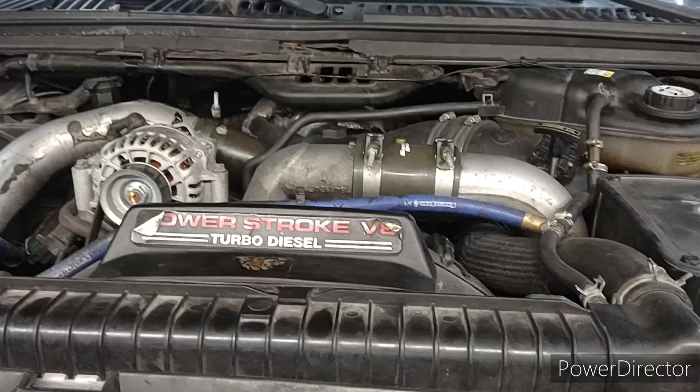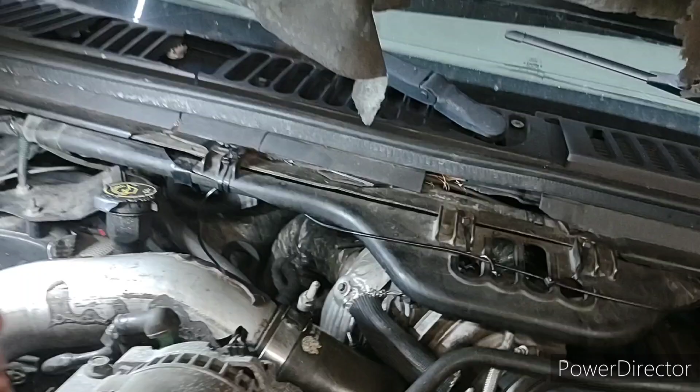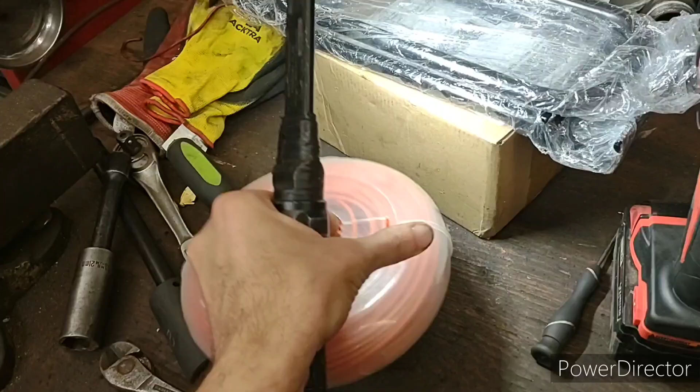Doing some maintenance today. I checked, been having some sluggish acceleration, so I checked the map sensor hose that goes into the intake body there. I pulled the hose out and ran a piece of string trimmer line down in the hole, made sure the hole was actually clear and wasn't anything blocking it, so that was fine.

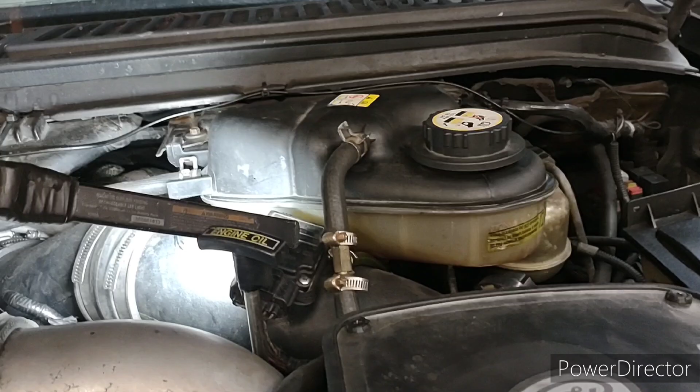Next thing I did is pulled this out. This is an intake sensor for airflow or something like that, MAF I guess they call it, mass airflow sensor. Took it out, cleaned it with some electronic parts cleaner, made sure it was clean. And then I also cleaned

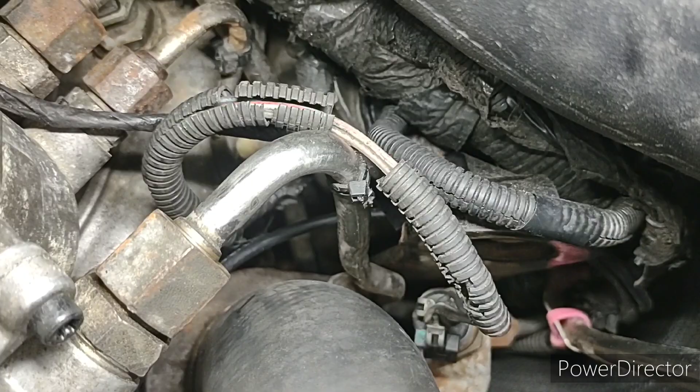right there. That is your EBP, exhaust back pressure sensor. I used, I think, like a 25 or 26 deep well socket to get it out.

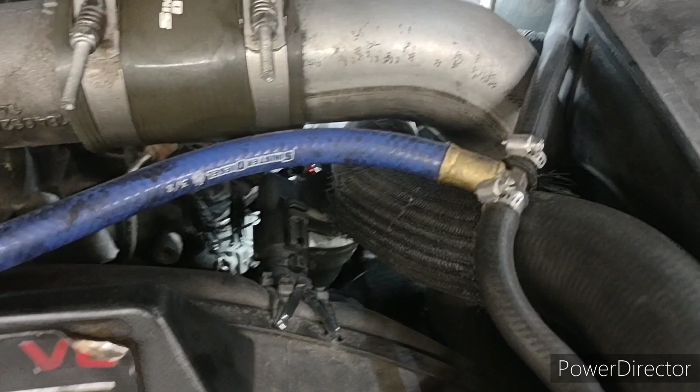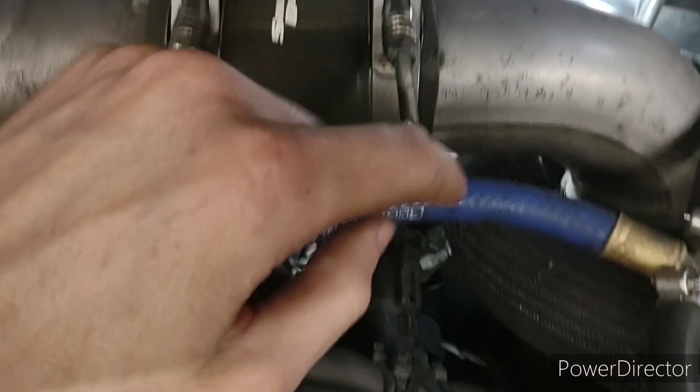And then I ran a long piece of string trimmer line, probably a foot or so, coiled up there. Ran that down through the tube a couple times. And then, I know they say not to, but I did spray carb and choke cleaner into the exhaust back pressure sensor to clean it out. There was some gunk in there. If that ends up frying the sensor, oh well, I guess I'm buying a new one.

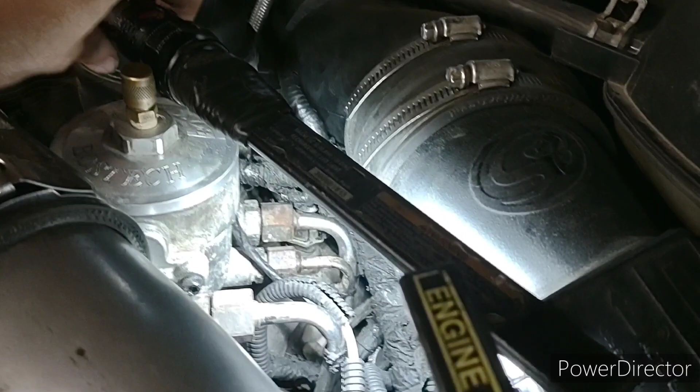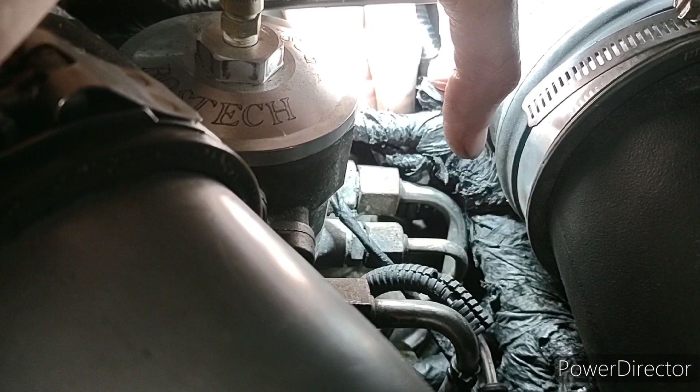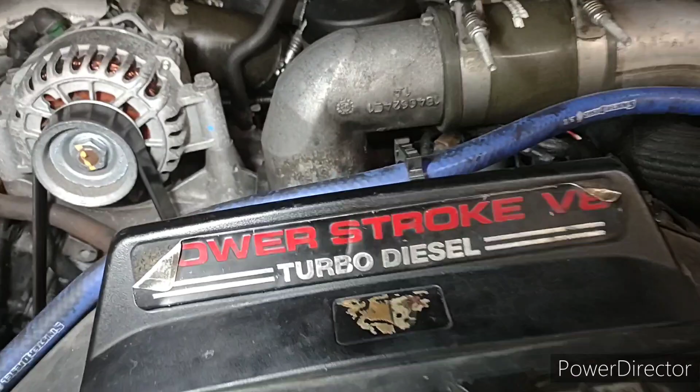And then, while I was already in here messing with sensors, right here, can't really see it, is your other intake, I think it's an IAT2 intake air temp sensor or something. It's right there. That one was totally covered in gunk, so I just took that, cleaned it off with some carbon choke cleaner. Actually, I ended up having to let the tip of it sit in the carbon choke cleaner to actually break it down so I could get it off, because obviously I'm not going to pick at it with a pick or anything, since the sensor in there is super breakable, I guess we'll call it. Anyway, so I cleaned all that.

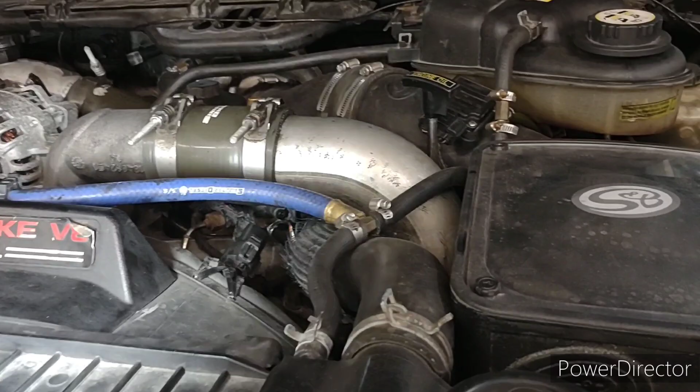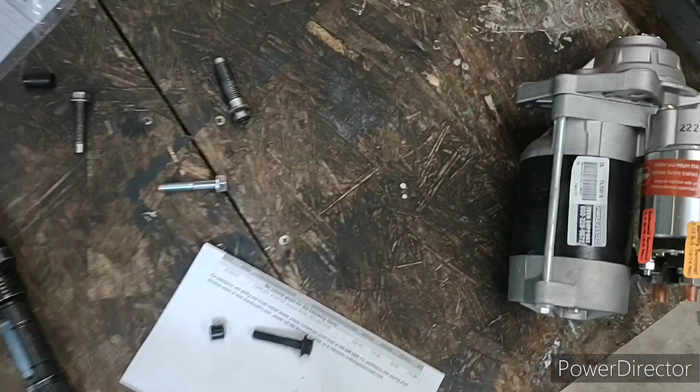And then so I did all those sensors. Haven't fired it up yet, because when I went to fire it up this morning, it went click. I'm like, well, that means the starter. Truck's got about 189,000, 180 plus thousand miles on it. I'm not the original owner. So I'm like, well, I guess it's time to do the starter upgrade.

Checking out the forums, everybody says, you know, go to the 6.4 direct bolt in. But I'm like, well, price wise, I ended up going with a 2017 Ford F-250 6.7 liter starter. The form factor is identical. The only difference is this is the top bolt, towards the top bolt.

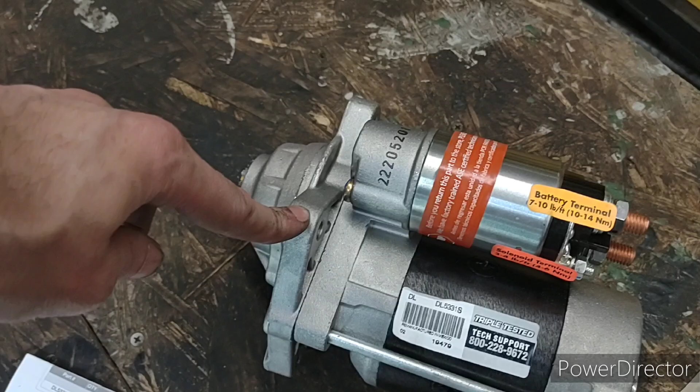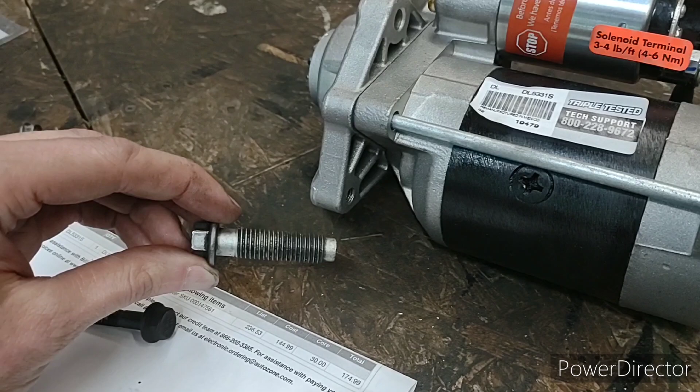This is about the 9 o'clock position when you're bolting it up, and then this is at the bottom, about the 6 o'clock. The only difference, like they say on the 6.7, this is the original bolt out of your 6.0 starter. And then this is one of the 3 bolts out of the 6.0 starter as well. However, they went to 3 of the same bolts for the 6.7, which happens to be a metric bolt M8 by 1.25 thread pitch, and I believe this was 40 millimeters long. So I went to the hardware store and I bought another bolt, same length.

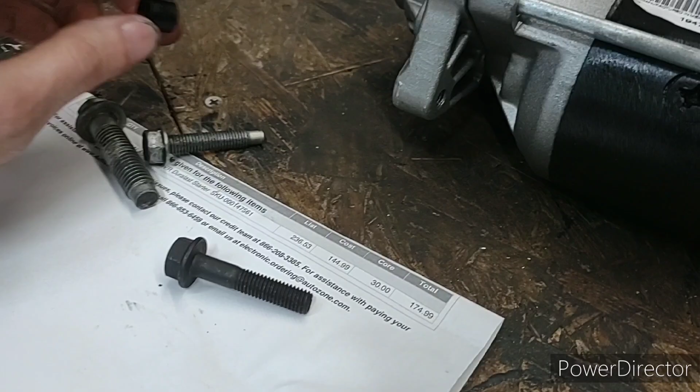Now the problem, because this bolt goes through your transmission bell housing, so this goes to there, the hole is that size, not that size. So I also picked up a nylon sleeve. That's not too long, I believe this was... I forget what the sizing was. I can put that in the details.

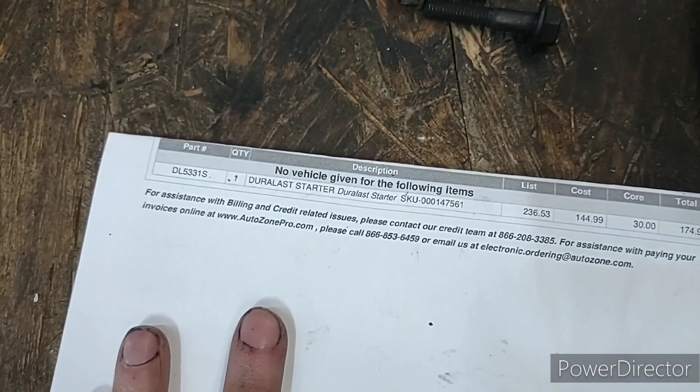So now we're going to get this thing bolted in. I did end up going to AutoZone. This is the information for it, for the part number. So hopefully I bolt this in and the truck fires up. Apparently 3 times faster is what everybody's saying. So, I'll let you know.

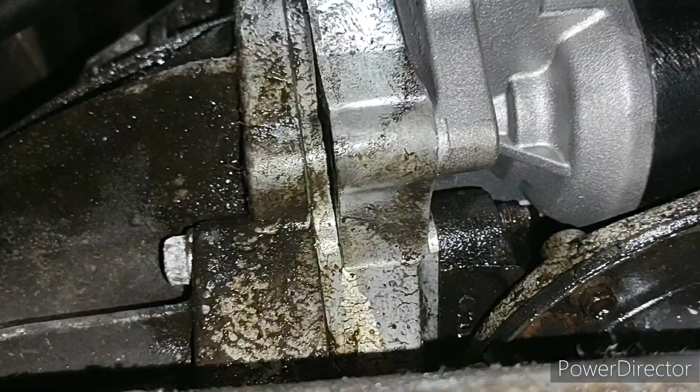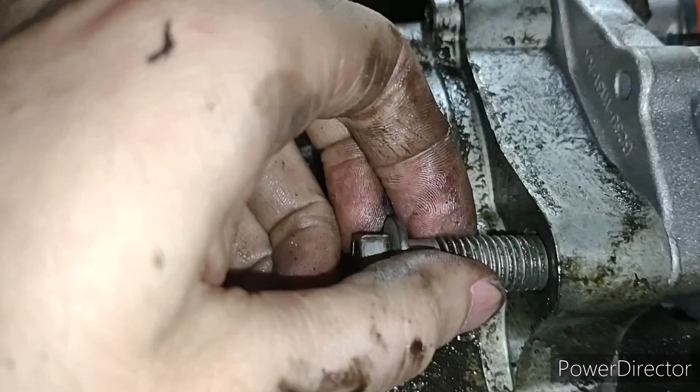Alright, one thing to note while installing: the old bolt, when you put it in, there is original play in it. It's not a perfect fit. So when you go to put in your new bolt with your nylon sleeve, there will also be play unless you can find a sleeve that's machined perfectly. I ended up just using a small washer because the head is a little smaller than I wanted against the backing of this transmission mount. So I grabbed a washer out of my bin.

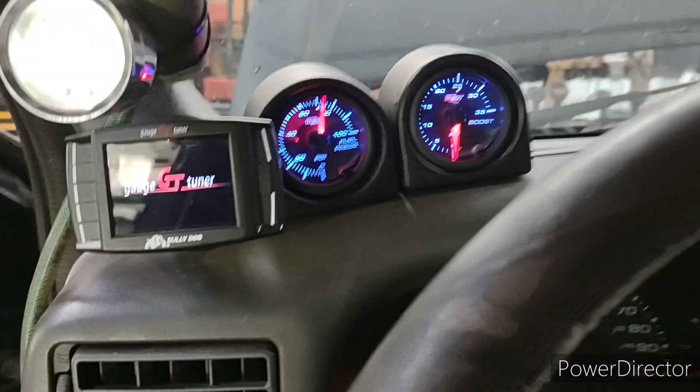Alright, we're gonna finish getting this tightened up. Let's see what happens here. Of course I reconnected the batteries for this, so got good fuel pressure. Let's see how it sounds.

Definitely spun quicker, smoother, less struggle.

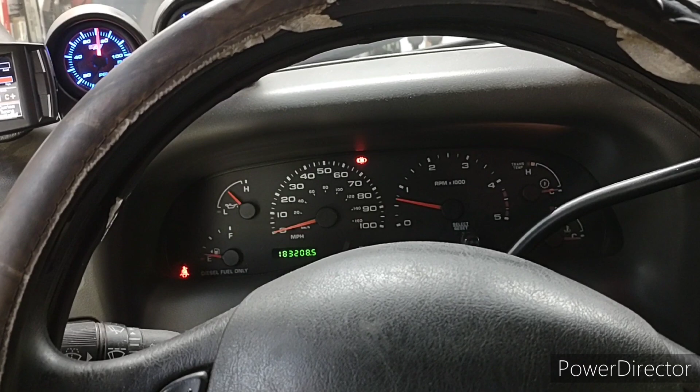Batteries were the usual 12.6 charged, but as soon as you cycle the key on, glow plugs hit your batteries, amongst everything else, your vacuum pump. So your batteries will dip at some point. Mine dipped to about 11.8, unfortunately. They were new a year or two ago.

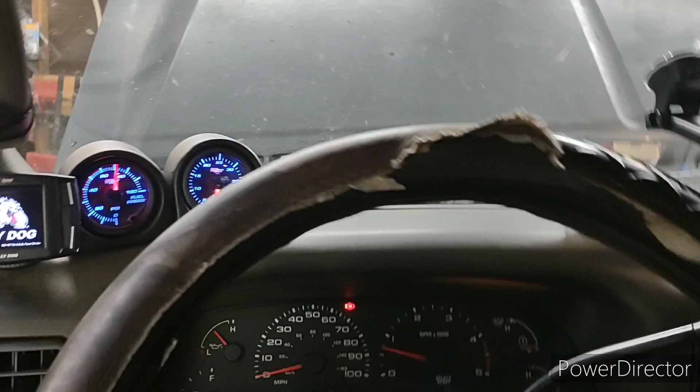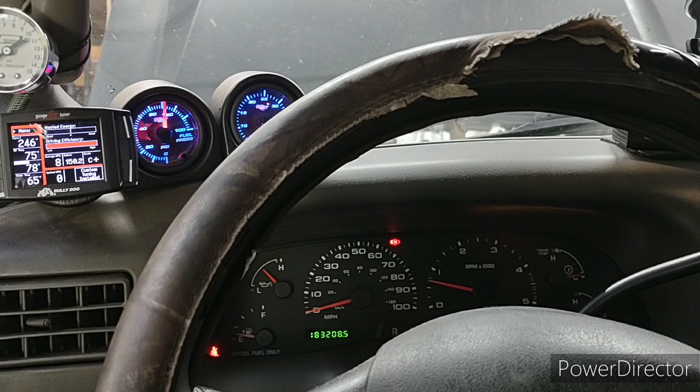Right, let's go ahead and try that again for fun. Let's see. Oh yeah, it definitely starts quicker since it's spinning faster and harder. It usually takes a few seconds longer than it does with this new starter. So we'll call that a success.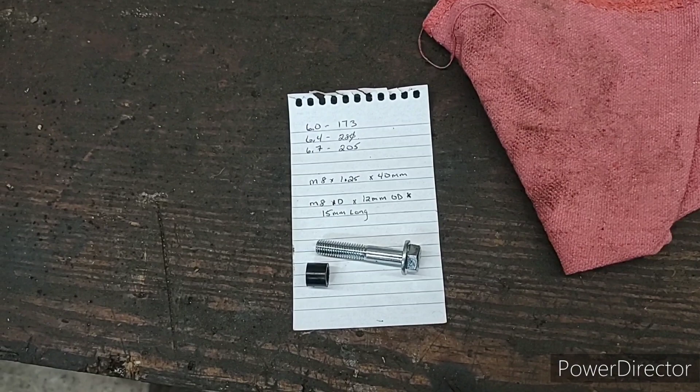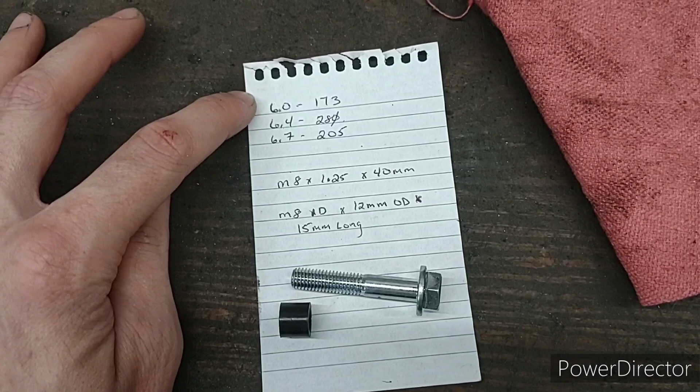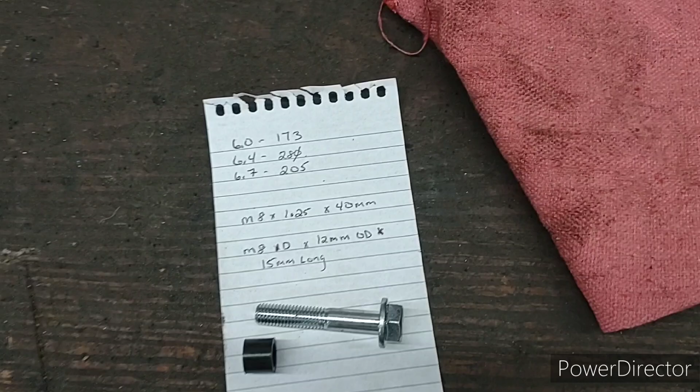Alright guys, so in recap for this, installing a 6.7 starter in a 6.0: I quickly jumped on AutoZone's website. A 6.0 starter would have been about 173 plus core. The 6.4, as you see, was 280, and the 6.7 was 205. So I ended up going with the 6.7. The one I got was for a 2017 Ford F-250 4x4 with the 6.7 in it.

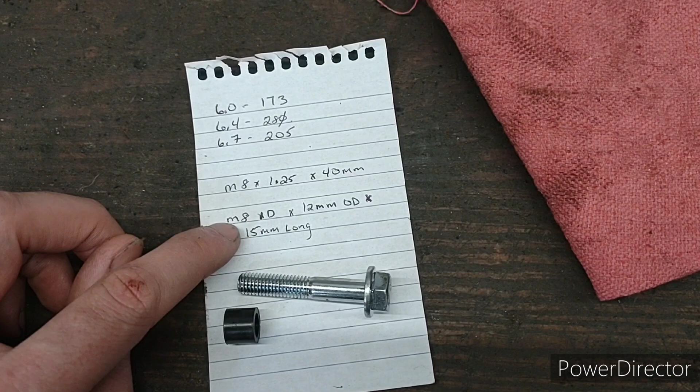That was the price. This is the bolt, I just picked it up at my local hardware store. I'll put a link in the description if you want to buy it from Amazon. And this is the bushing. From my googling, everybody says you need about an 8mm ID, about 12mm OD, by 15mm long. This was just something I found at the hardware store that seemed to work.

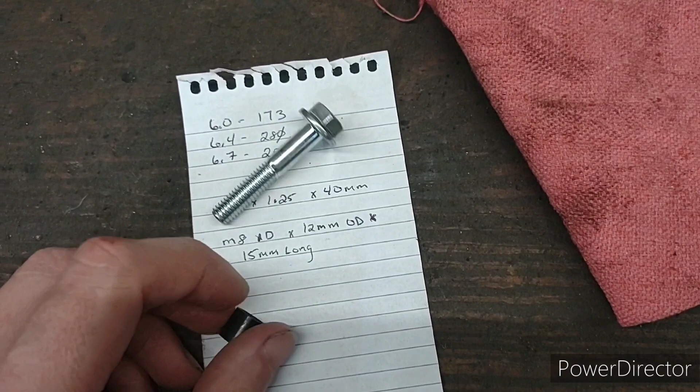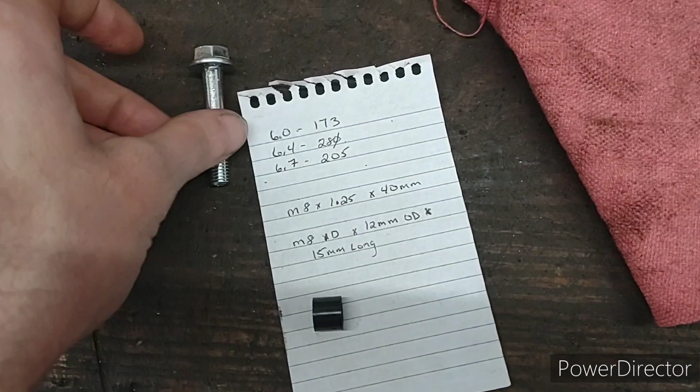But overall, I do recommend the upgrade. If you're not looking into taking the extra time to find the bolt and the bushing, then yes, the 6.4 starter is a much easier install.

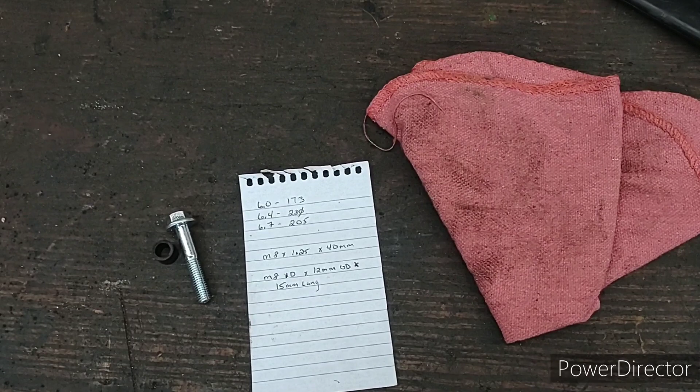Disconnect your batteries, remove the bolts. All the bolts in the starter are 13mm. At the top one at 12 o'clock I used a short socket with a 6-inch extension to get that one, and then I pretty much used that for the one at 9 o'clock and the one at about 6 o'clock. However, the one at 6 o'clock, instead of the hex head being towards the front of the motor, it is on the back side pointing towards the transmission. I had to use a long ratchet to break it free since it had been in there since it was OEM.

And to get the solenoid off, you just need a 16 millimeter for the power wire. You could use a short socket if you want, and a 10 millimeter deep for the solenoid, the small wire.

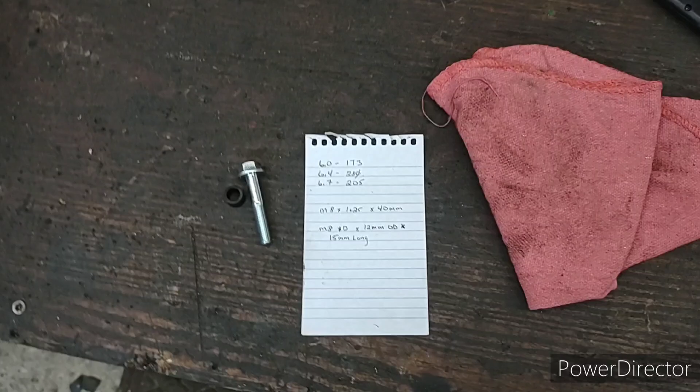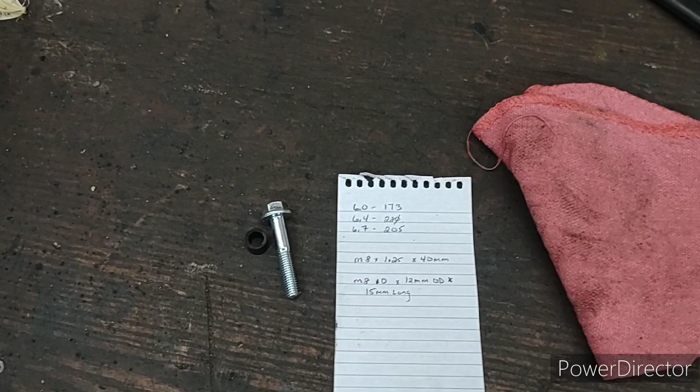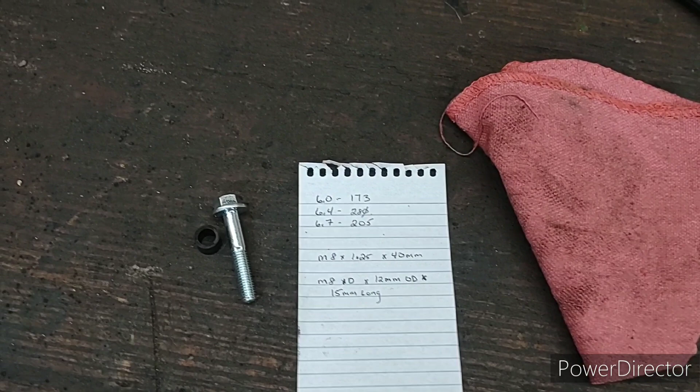And overall, the install went in just fine. It did seem a little tight on the bolt at 9 o'clock, but it went in fine, didn't cross thread. The very bottom bolt, the one that required the new bolt — at the end of the day, it's there, it holds the starter. It's the third bolt at the bottom, and it's not doing a whole lot of work in the sense of twisting action, in my opinion.

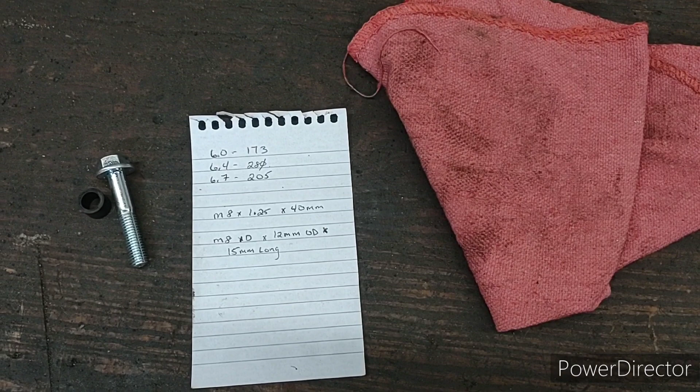But I just wanted to do a quick recap on that, because I know it's a very talked about topic, so just wanted to recap on it. Later.